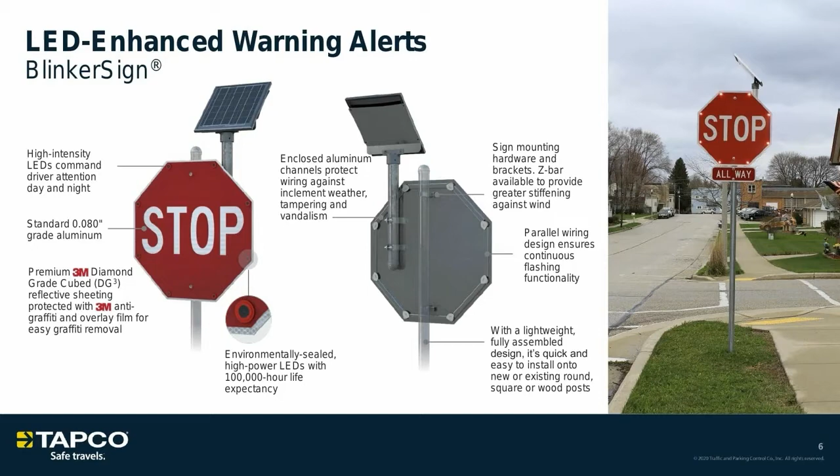Again, with these signs, we can make these in any legend. So I know the stop sign is what we have become most popular for, but any MUTCD legend or any custom legend - really the only limitation we have is the LED colors we have right now, which are red, yellow, white, and orange. That does accommodate about 95% of MUTCD signs. That's really the only limitation at this point.

We do offer auto dimming within our LED enhanced signs. So based on the ambient light that's outside, that will determine how bright our LEDs will flash. We have a 6-step algorithm that we use throughout the day. This allows for better battery conservation and allows the LEDs to be bright enough for drivers to see, but not blinding for situations such as nighttime.

TAPCO did realize, as we were in the market for a number of years with LED enhanced signs, that there were other types of warning devices we could be a part of. As we understand, something such as a beacon has been in the industry for 40, 50 plus years. In regards to beacons, there is an MUTCD guideline that everyone needs to meet, so there aren't a whole lot of feature benefits when it comes to an LED beacon head.

TAPCO utilizes Dialight models, which is a well-known, well-represented brand in the industry. We offer these in 8-inch and 12-inch sizes. And again, really our big claim to fame with our beacons is our ability to custom mount them however you need be. We're not limited to a certain type of pole setup.

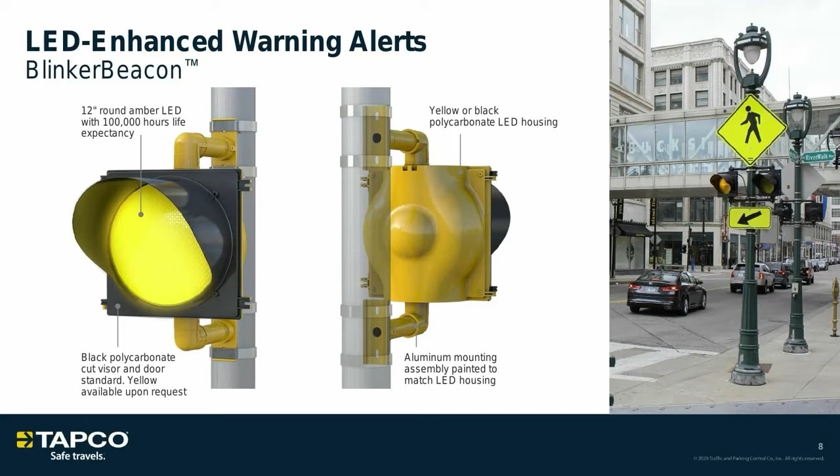One big value add that TAPCO offers in the industry is power sourcing. We want to make sure we understand your situation, look at the area, and provide the best power source for it. We're always going to try to push solar because we feel it's more economical and green friendly, and we make sure we have accurate solar sizing for your equipment. It's not a one size fits all - depending on which region it's going into and what we're powering, we need to make sure we have the accurate size solar panel and batteries to give you the autonomy and battery backup needed for your system.

But when solar is just not feasible - if you have large trees or a nearby building - we have other different types of options. We can do straight 120 volt AC, very easy - if you have power nearby we can just directly tie into that. We do offer AC with battery backup, just in case you're worried about that AC going down. We also have DC to AC conversion kits, so if you're worried about solar potentially having any issues, we have a conversion ability to go straight to AC.

As you see in the photo, we also offer streetlight power. This can be very beneficial in situations where solar isn't feasible and you don't have power nearby - running power out to that location can be very costly, but if you have a nearby streetlight, it's probably running off 277 volts. So what we'll do is tie into that streetlight power, which at nighttime will charge our battery, and our battery will continuously run our system. No matter where you're putting in one of our solutions, we will have a power source available to run it.

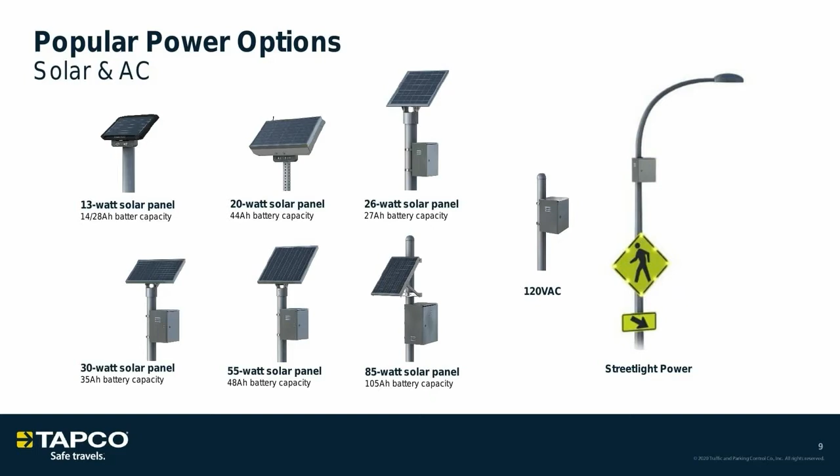The first solution I'm going to jump into today is our dynamic curve warning systems. These have been around with TAPCO for 10 plus years, and really took off a number of years ago when we teamed up with FHWA for a study, which I'll jump into here in a second.

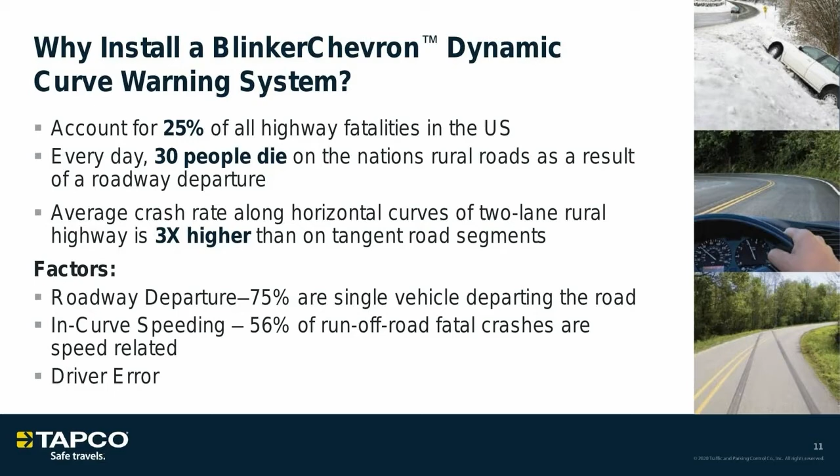Rural curves account for about 25% of all highway fatalities in the U.S., usually dealing with runoffs, roadway departure, speeding, and driver error. In a lot of these rural situations, there's just not enough lighting. That's where TAPCO teamed up with a couple of agencies and FHWA to develop a solution. We ran testing with FHWA for about 18 months at 12 curve locations across the United States. After that 18-month data, we proved that we reduced crashes at horizontal curves by about 58%.

We've actually seen higher data in some local municipal studies we've done, but we think that is excellent data to justify the cost of trying to put one of these enhanced systems in there.

We have well over 200 installations nationwide at this time. We usually like to take a look at understanding if it's a rural versus urban setup to provide you with the proper design.

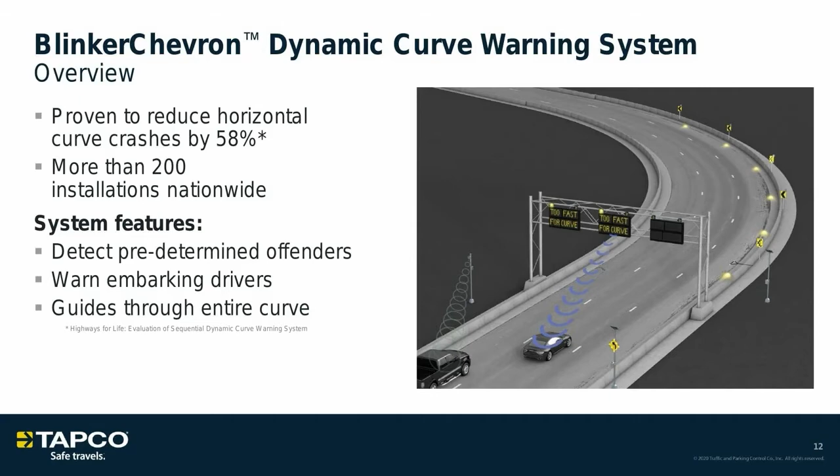We have a couple of different flash patterns that we offer to guide you through that curve. One is just a true sequential flashing pattern, which gives you a pull-through effect to pull that car through. We can have all the signs simultaneously flash as well through that curve.

For some longer radius curves, we offer segmentation as well. So for instance, if you have 16 curve warning signs sequentially pulling a car through, the car is never going to be able to see all the way through those 16 signs. So we'll segment them into, let's say, 4 to 6 signs per batch so that the car gets the true effect of the pull-through.

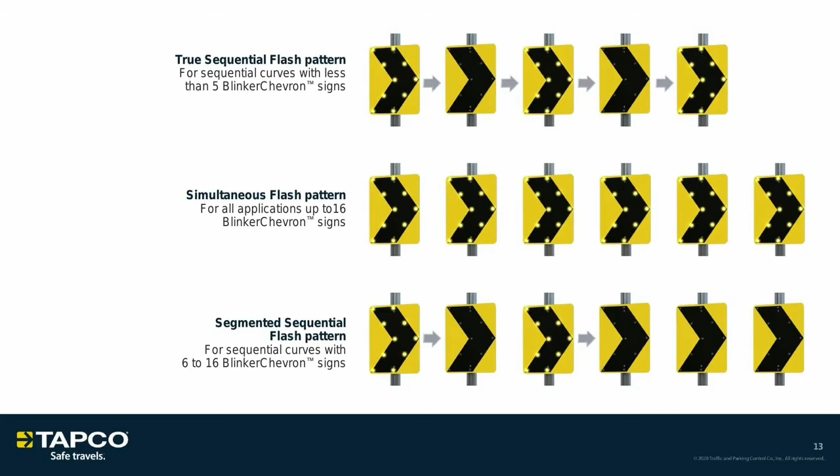One of the big value adds TAPCO came out with a couple of years ago with our curve warning system was developing a ruggedized version of our LED enhanced sign. We had put our standard 080 or 125 signs out in some mountainous, snowy, high-speed truck traffic areas, and we realized after a number of years that the weather environments had too much effect on the signs as far as wear and tear. So we developed a ruggedized version of the sign to put up in those types of areas.

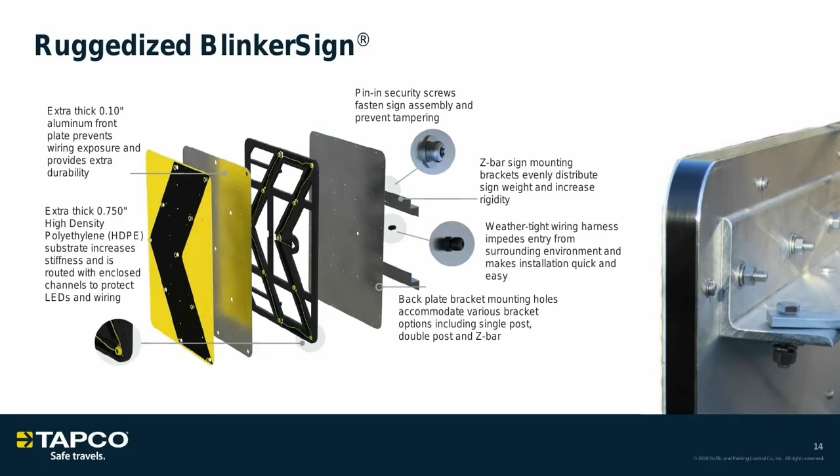So that's something we're going to ask when you come to us with a solution - what is the speed, where is it going, the region - understanding the environment to suggest whether we go with our standard model or a ruggedized version. These ruggedized versions can be made in any MUTCD sign as well. We do them most with our curve warning systems, but any MUTCD sign we can make ruggedized.

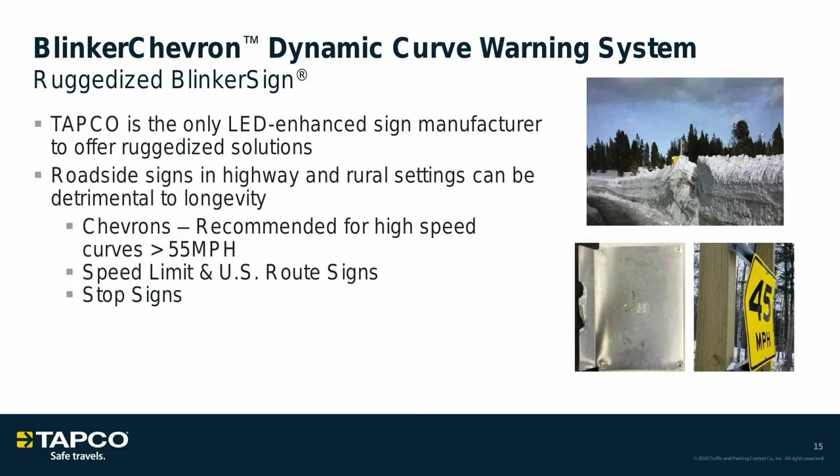As we find out your situation, we'll suggest whether to go with a standard sign, or potentially a middle solution, which is just putting some Z-bar on the back of the sign to make it a little more stable, or otherwise going with a ruggedized version.

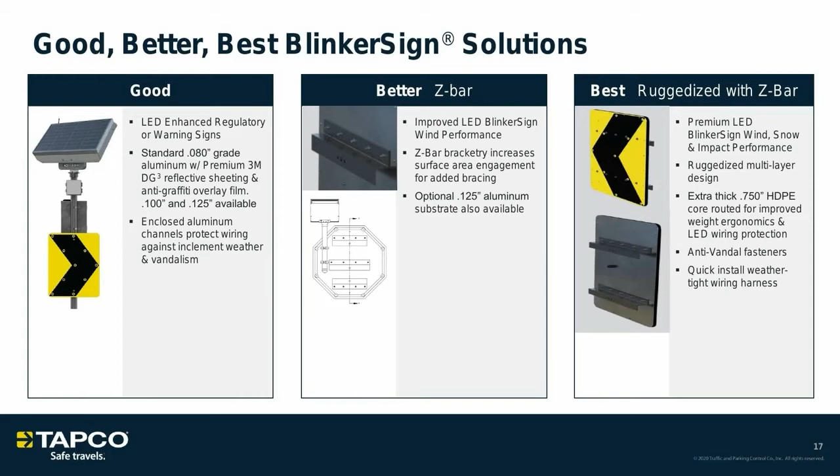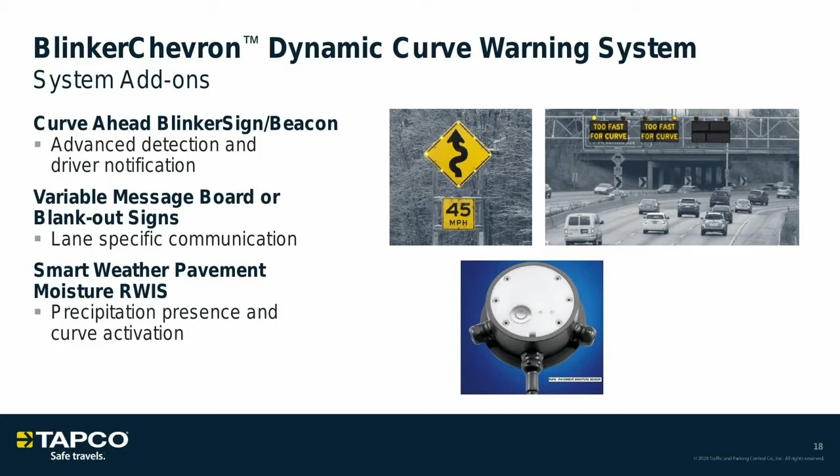We can not only run these 24 hours a day, we commonly have them activated by a Doppler speed radar. But in situations that are more climate-related, potentially slippery rain type scenarios, we offer some pavement moisture sensors as well to trigger the system. So a lot of different features and add-ons that TAPCO can offer.

The next solution I'll get into here is our overheight warning system.

TAPCO dove into this solution about 6-7 years ago. We knew of a couple of overheight detection companies that existed within the industry, but we felt there really wasn't a full-blown solution that existed out there at the time.

As our bridges continue to age and our vehicles continue to get taller and our semi-trucks continue to carry higher loads, a lot of these bridges that were developed many years ago are just not feasible for these vehicles to get through. So making sure we provide the proper signage and warning systems to reroute those vehicles from those areas is very important.

Anytime a vehicle hits a bridge or gets stuck under a bridge, the cost of having to repair, maintain, the liability behind it, closing the roads - it's very, very costly. So if you do have scenarios where that happens annually, this is a great solution to look into.

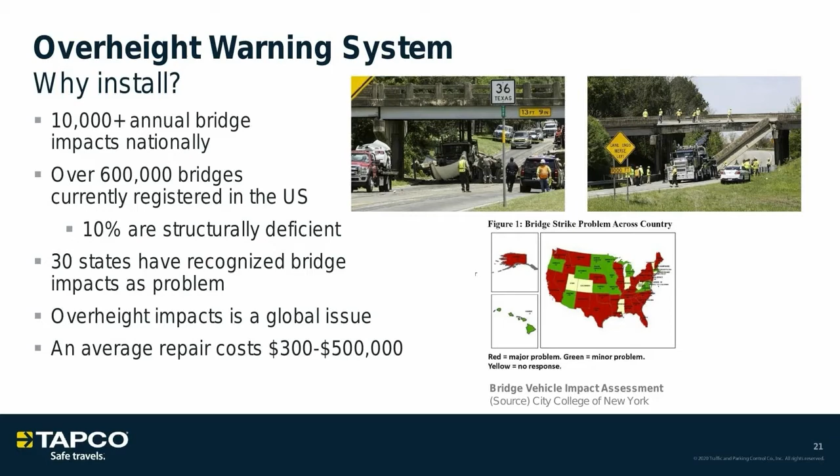The way our system works is as a vehicle heads towards that location, we'll have poles on each side of the road holding either a single beam or a dual beam sensor system. As the vehicle actually triggers that system, it will activate a warning device.

The reason we have single beam and dual beam: single beam works if it's a one-way road, though it isn't ideal for traffic coming the other direction—it's a lower cost solution. But we strongly encourage doing a dual beam. Dual beam allows for redundancy to ensure nothing like debris or birds actually trips that beam. So the dual beam is definitely what we suggest.

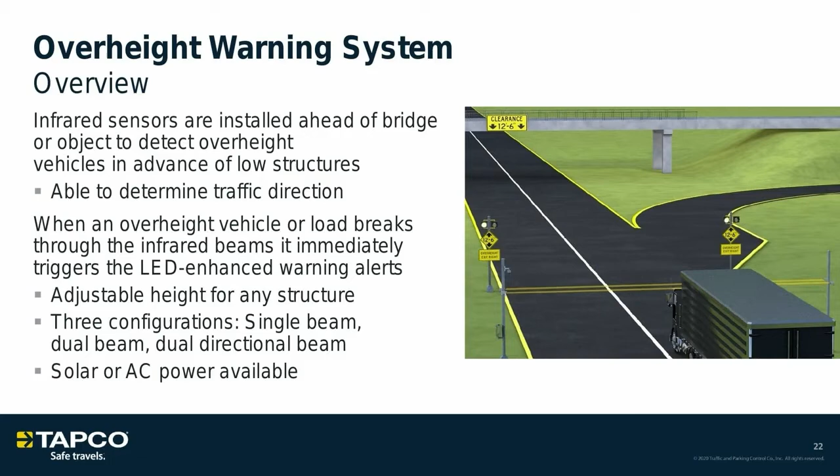Some of the great add-on features we offer for our overheight warning system: one is an overview camera. We use it for visual indication if you want to receive alerts anytime the system is triggered. We just install a modem inside your system, and through any web interface you can log in and we can provide visual recognition as well, instead of just receiving a text or email. That's where license plate and camera recognition cameras come into play.

Another great feature we can offer is CVI, connected vehicle interfaces. I'm going to talk about that through a few of our different solutions today. TAPCO does offer a full-blown CVI solution that includes roadside units and onboard user interfaces. As we continue to develop new systems and roads across our industry, we'll continue developing more systems for smart vehicles that are coming out. I'll talk about that here in a little bit.

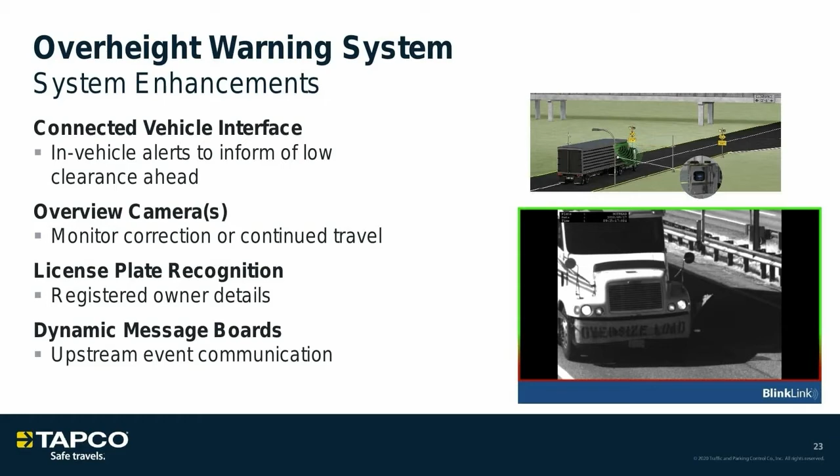The next solution is our high water warning system. It came out about 6 or 7 years ago, after Hurricane Sandy came through Massachusetts, New York, and New Jersey. A couple of different agencies came to us asking what type of solution we could develop to reroute cars from those flood zones. That's really what got us into this solution, and we've learned and created solutions and features ever since.

While flooding commonly occurs in coastal areas, it can happen all across the United States. There are poorly designed roads underneath bridges with high annual rainfall that can flood consistently, and it's really hard to reroute vehicles from that area. It's hard for drivers to know when that's coming up, so that's why we're developing this solution—to give vehicles more notification or reroute them from that area.

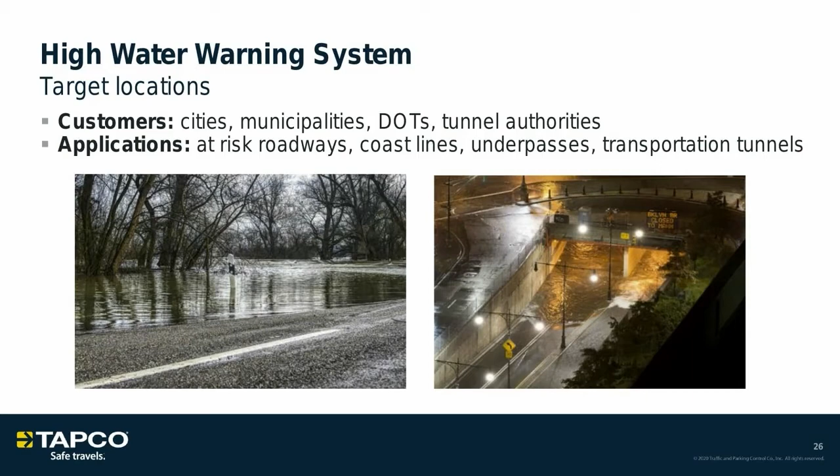While coastlines are very common, underpasses, tunnels, and other at-risk roadways are all scenarios where we can utilize this type of system. Most commonly, TAPCO utilizes a 3-pole system for this scenario. We make sure to understand your area and place our detection pole at the absolute low point, to ensure that when the water rises, it's tripped at the proper time. At that point, through wireless communication, we activate enhanced warning systems to give the vehicle notification or reroute them from that area.

One of the great features we offer, like in the overheight system, is alert-based notification through visual recognition. So you can know when the systems are being tripped, and see if there are any vehicles stalled at that point. Those are great features to offer, just to be a little bit more proactive as you're heading out into the field.

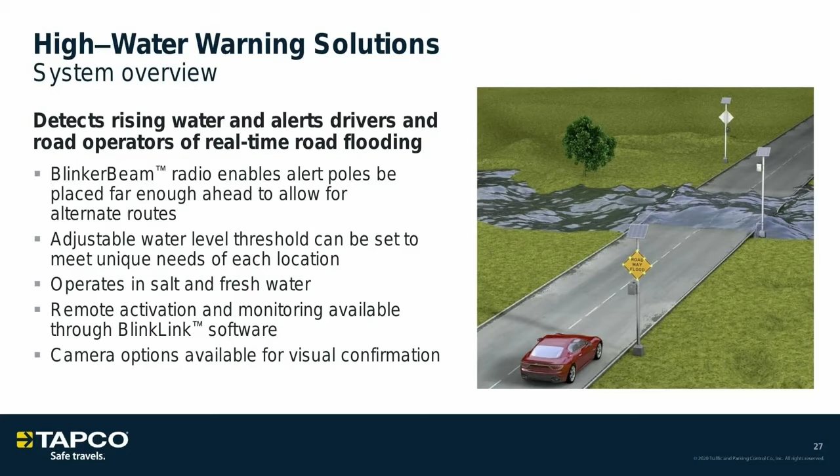While the 3-pole scenario is most common, TAPCO is happy to design a full-blown system throughout your potential coastal city. The largest layout we've ever done is about 80 signs throughout a community. We took a drive through that community to understand where the routing was to evacuate vehicles through that coastal city. We made sure to put the detection at the proper points and the warning devices at the proper points to give vehicles the proper routing scenario to leave the community when those types of floods are occurring.

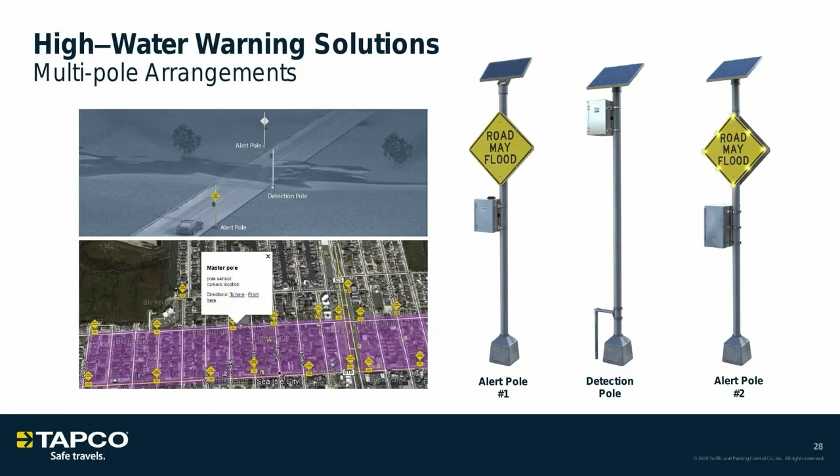TAPCO offers a few different types of sensor mechanisms right now, because with high water, depending on the scenario—whether it's a bridge or tunnel, an at-risk roadway, or whether we're talking coastal saltwater or freshwater—there are different types of sensors best for each scenario. That's why TAPCO mentions a few different ones here, but we're definitely open to other ones in the industry as well.

The photo eye, which TAPCO had used for a long time, is a fantastic sensing mechanism, but in saltwater locations it can get a little debris on it. So it's something you'd need to maintain and go clean every few months. That's why TAPCO moved into the pressure and float mechanical type of layout, to allow for more of a mechanical situation that wouldn't have to deal with either saltwater or freshwater issues—it works easily with both.

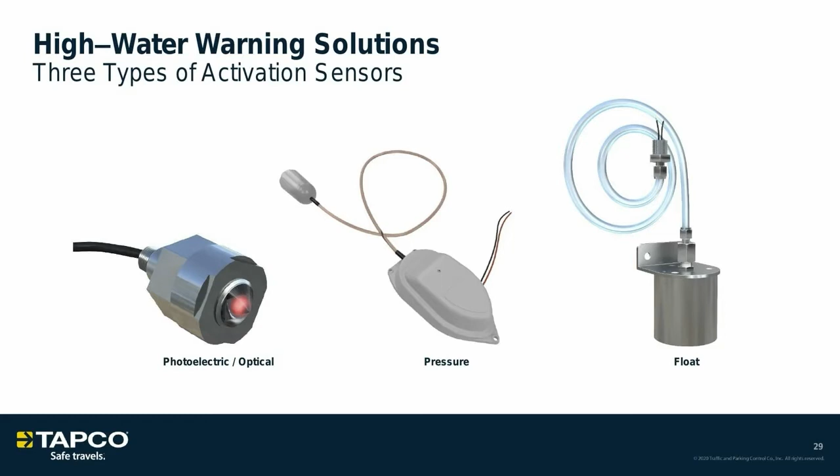The way the system works for a pressure sensor is it uses air pressure, and as water fills up it triggers the switch. The second part of that redundant two-part mechanical system is the float sensor—as the water rises and pushes up that float mechanism, it'll also trigger a switch. So it gives a two-part mechanical setup to ensure the system is triggered whenever a high water incident occurs.

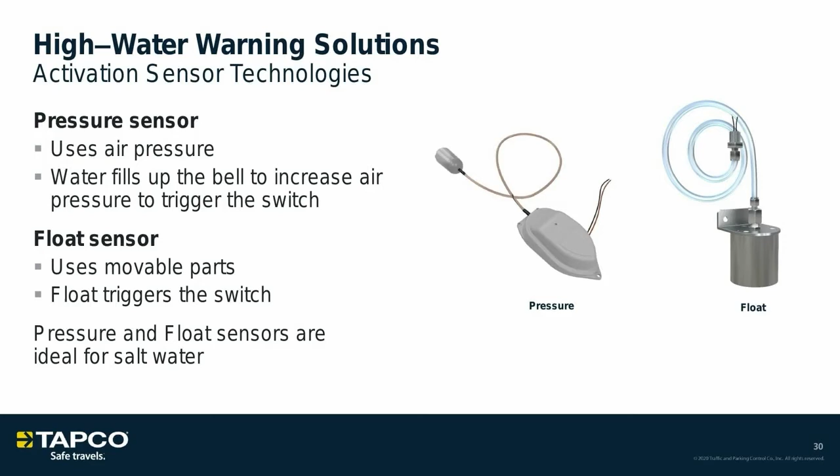As I talked about here, there's a nice visual web interface that TAPCO offers called BlinkLink, so you can get the actual visual image of that flood zone to know if you need to send somebody out or not at that time.

As I talked about earlier with the overheight connected vehicle interface, I'm going to get more in depth on that in a few slides, so I won't talk about it too much now, but this is something that can be utilized in any one of the solutions I talk about today.

There are a few different high water warning system companies out there at this time, so the real value add for TAPCO is the A to Z, beginning to end, turnkey experience—us going out to the field, helping design, helping you understand where the best pole placement will be, and providing different types of detection points or warning devices to best suit your application. Most competitors offer a single type of detection and a single type of warning device; we try to give you different options for different scenarios. Afterward, TAPCO is there to help you on site, oversee the install, and support turn-on, making sure everything is running great before we head back. We just want to provide that A to Z experience.

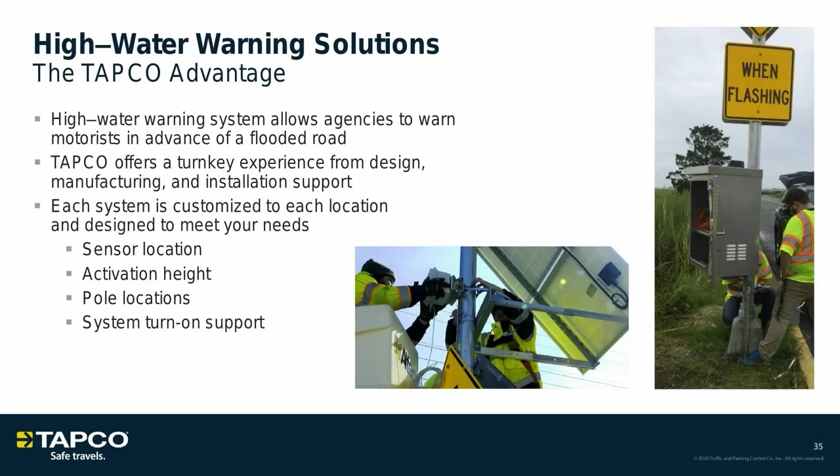The fourth system I'll get into today is our intersection conflict warning system. There are many rural scenarios where high-speed main thoroughfare traffic bypasses minor road traffic, and whether due to visibility or consistent traffic, incidents commonly occur—but it just doesn't warrant putting up a signalized intersection, which can cost $200,000-$400,000. So TAPCO has taken that same technology through detection, communication, and warning devices, giving vehicles proper warning for caution and slowdown as they hit this location, whether it's a blind corner, a hill, sharp turns, or high-speed traffic passing a minor road with too many speeding incidents.

TAPCO will put warning devices at all four corners, making sure we're giving all vehicles the proper warning to get them to slow down going into that intersection.

One type of feature that TAPCO has recently added is a portable camera data collection system. If you want to get some of that data prior to putting out the system, or collect some of that data while the system is out, that's something we offer. Many of you may have already collected data and understand the amount of incidents, accidents, and vehicle traffic that already goes through, but it's just another feature that TAPCO offers with these systems.

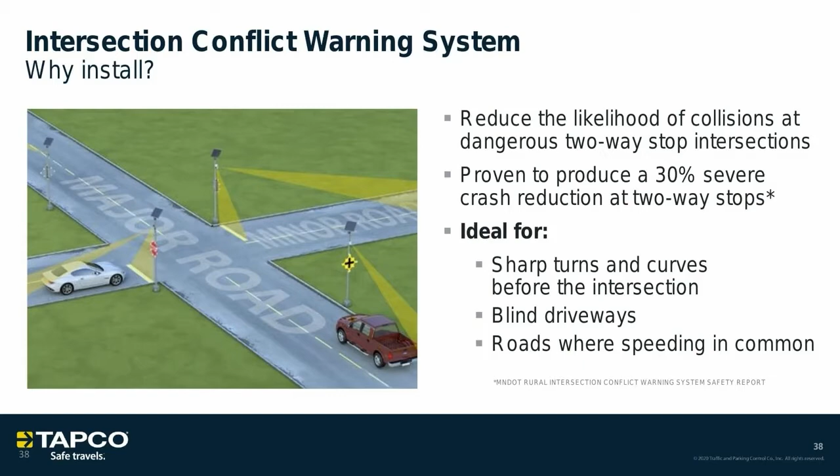Next, I'll get into school zone systems. As school starts this year, we want to make sure we can guide our children properly through the correct areas to get to those schools safely and soundly, as many times these schools are very near high-speed roads. We want to make sure we're getting those vehicles to slow down, especially around school hours.

TAPCO offers a number of different warning devices, anything from dual flashing beacons to LED enhanced signs to driver feedback displays. The great thing TAPCO can offer with these is that they can all be utilized through that web interface. So if you're having to manage 15 or 20 different schools that have 4 different warning devices each, instead of having to go out during half days, snow days, specialty vacation days, or summer, you can actually log in and set them all within a matter of minutes. It's a fantastic cloud-based feature that we offer for all of these devices to really save you a lot of labor time throughout the year of having to change out the clock on these types of warning systems.

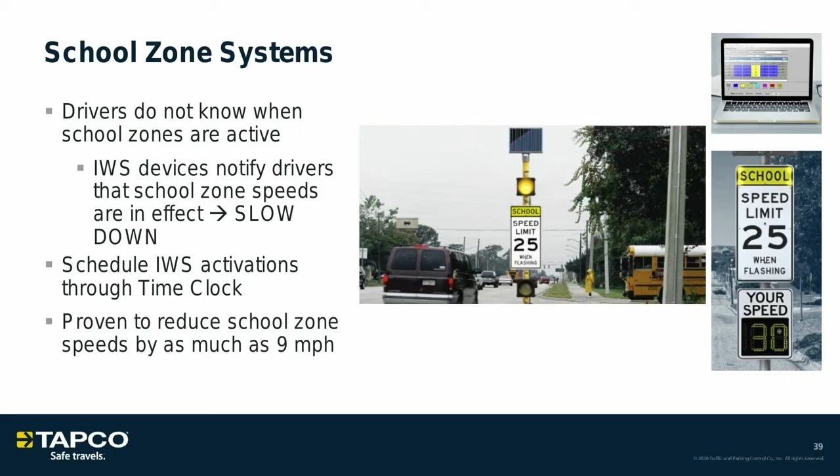One of the features we've offered on this remote alert-based system now is lights out notification. Not only can you program and set your calendar remotely, but you can actually receive alerts if the battery is low, if your solar is low, or if the communication is low. And now we actually offer, if you have a lamp out on your beacon system, we can provide that information as well. It's just giving you more diagnostics to understand when you need to go out into the field and maintain your equipment.

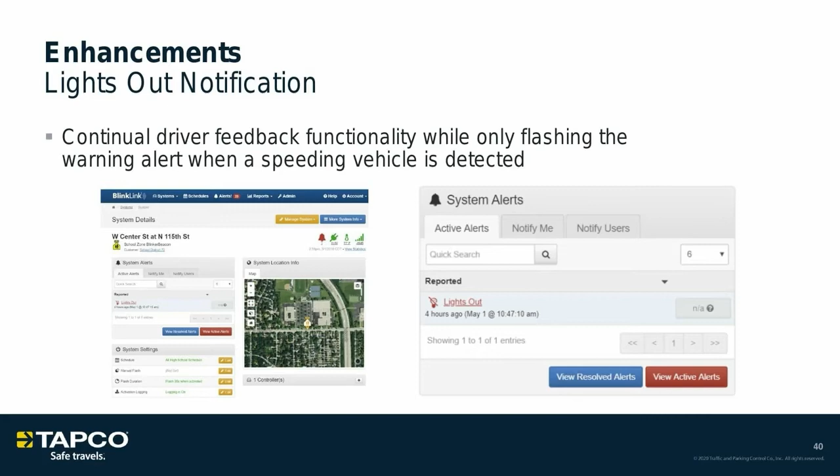The speed feedback signs I talked about for school zones are not only for school zones, but can obviously be utilized anywhere from a warning and regulatory standpoint. TAPCO offers, we feel, the most economical driver feedback systems in the industry. We offer both Bluetooth as well as cloud-based scenarios for monitoring and programming your systems. Many different digit sizes, many different additional features, different power sources from AC to battery to solar. We feel driver feedback signs are becoming very prevalent in our industry, and at this point we just want to make sure we offer all the features you need at the most economical price in the market. So if you need any quotes on a system like this, please let your TAPCO representative know.

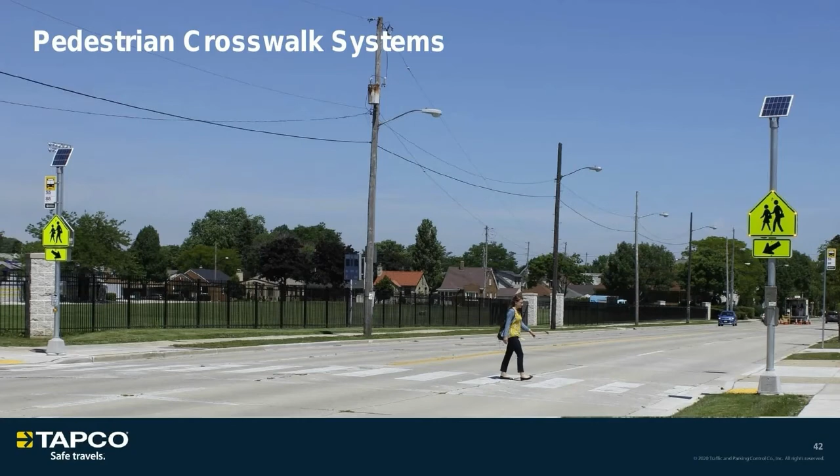Next, I'll jump into pedestrian mid-block crosswalk systems. TAPCO has been in this market for a good 15 years. We first came out with an LED enhanced warning sign, then we jumped into circular beacons, and then I believe it was roughly 2008 when the RRFB started to trickle into the industry and has really taken the industry by storm at this point.

The data that came back from the RRFB testing in St. Petersburg, Florida, many years ago showed the highest yield to pedestrian data of any type of yellow warning device that's ever existed. Due to that, the MUTCD made its own special section and has approved this type of warning device. So again, we aren't limited to the type of warning device you need to utilize, from LED enhanced signs to beacons to RRFBs to in-road warning lights, blank out signs, and we can trigger them in many different types of fashions.

The RRFB has to be pedestrian activated, so it needs to be activated by an active push button. We have many different types of those, or passive detection, which I'll talk about thermal in a bit, as well as IR walk-through bollards. Some of the LED enhanced or beacon systems are a little more capable of utilizing other types of systems, such as running 24/7 or on a time clock. The RRFB has very strict regulations on how it needs to be utilized, so we'll make sure to provide you with that education as well, if you are looking for that type of device.

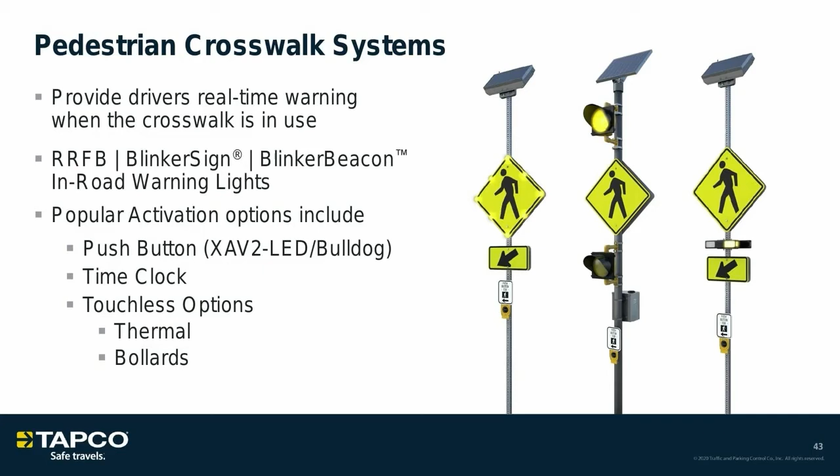So as I mentioned, FHWA did interim-approve the RRFB through IA-21, so TAPCO does follow this to a T. It's important to know that when you call in, we will make sure we follow the IA-21 regulation. Our LEDs do actually exceed that size requirement in IA-21, and we offer a universal mounting bracket to allow it to mount to many different types of poles.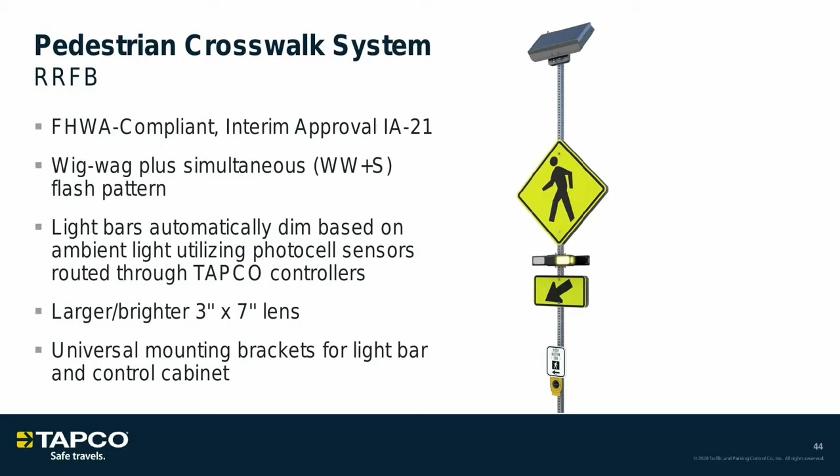I talked about earlier the thermal detection enhancement. We believe thermal is the most accurate type of passive detection out there in the market. Again, it detects directionality of the pedestrian. It allows you to set zones to ensure you are picking up the pedestrian when they're in that zone, and you're not false triggering when vehicles come by perpendicularly or around the corner through that crosswalk. Thermal is by far the most accurate type of detection out there, and we will eliminate any type of false triggers.

So if you are looking to get into passive detection because you're in an area where you're just not seeing people push the push button, we see that commonly in university and school areas, this type of passive detection is outstanding for that scenario.

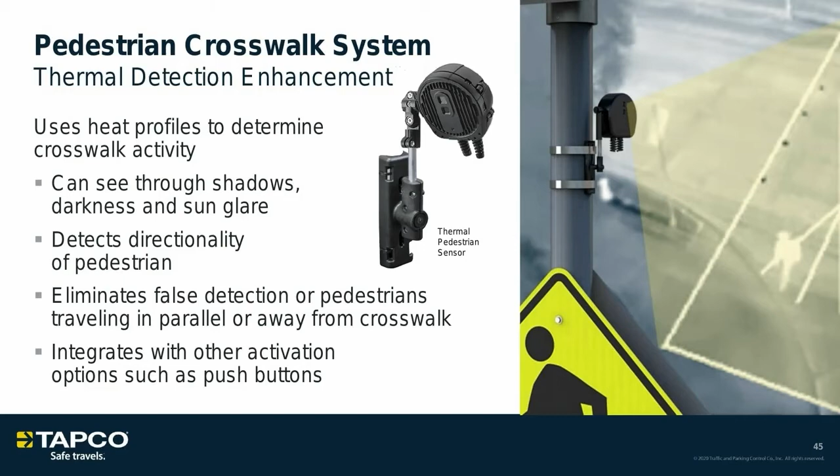Another great feature we offer as an enhancement to our mid-block solutions is our SafeWalk illuminator light. Not really sure why, but this industry hasn't had a whole lot of solutions for actually enhancing the crosswalk at night to see the pedestrian. We do a great job providing warning indications to vehicles that a crosswalk is coming up, but the industry hasn't always enhanced that crosswalk to ensure the pedestrian can be seen. So if there isn't a street light nearby, TAPCO offers an illuminator light to make sure we can enhance that crosswalk at nighttime.

The system will only activate via photo eye, so it's only available at night and will only trigger when the push button or the detection is set. Since it doesn't require much power, we're able to utilize the same type of solar options that we use with our standard equipment. So again, it's a great low cost added feature for your mid-block solutions.

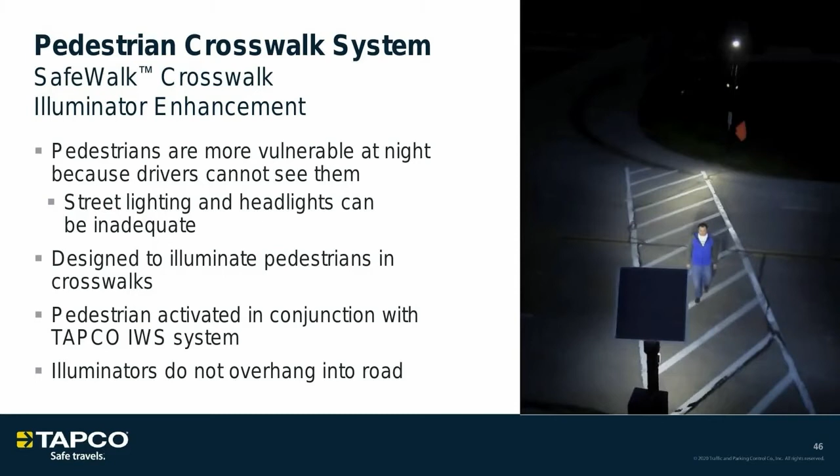Now I'll go into a little more detail on the connected vehicle interface. TAPCO jumped into this market about a year or two ago. We all understand, going through trade shows and webinars out there right now, that smart vehicles and CVI are one of the bigger topics, as people try to understand how we're going to develop our roads for the future for these smart vehicles. The nice thing about the development of the TAPCO system is we made it agnostic, so it's able to work with DSRC or 5G networks.

We understand that DSRC has a good footprint out there right now, so if you're looking to do a project currently, it's probably going to work with DSRC. But we understand the future is probably working through 5G networks as more towers are built, so we have the ability to work with either. One of the great things about this type of system is you may not need it right now, but all TAPCO systems can be easily upgraded to add this connected vehicle interface in the future. So if you're putting up any type of solution now, and you might think about doing something 3 to 5 years down the road, the great thing about our solutions is they can be easily upgraded, so you don't have to tear down the existing equipment to change it in 3 to 5 years.

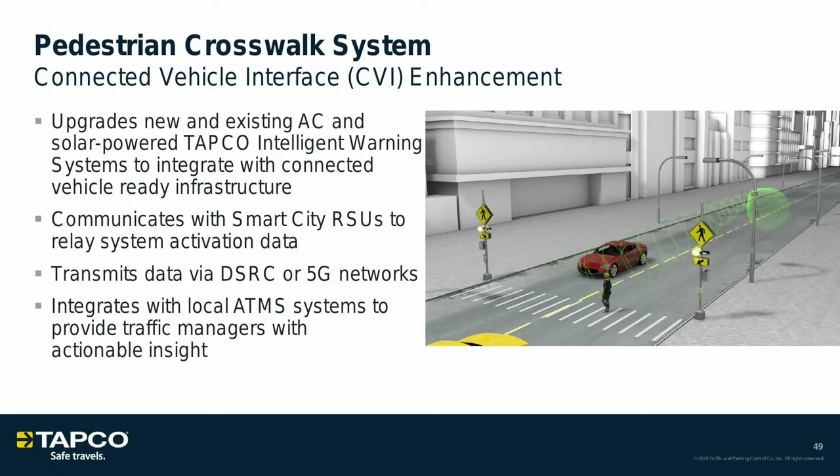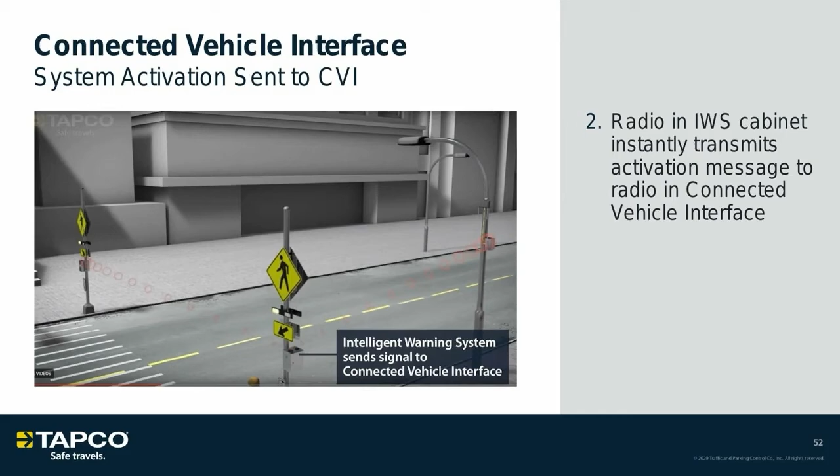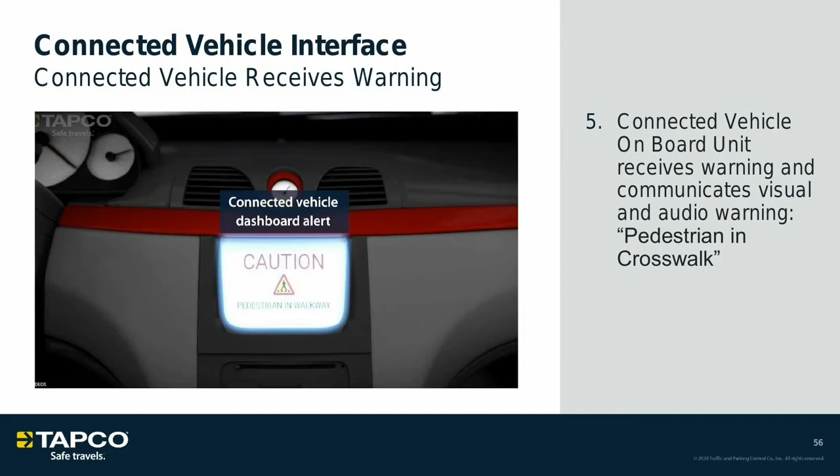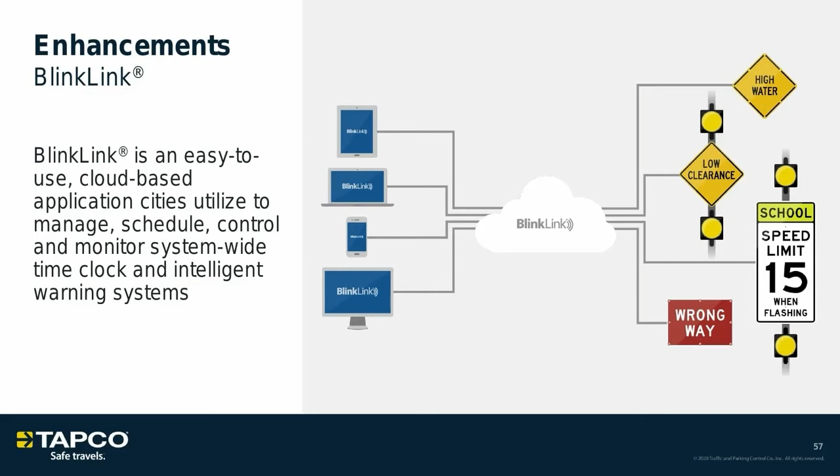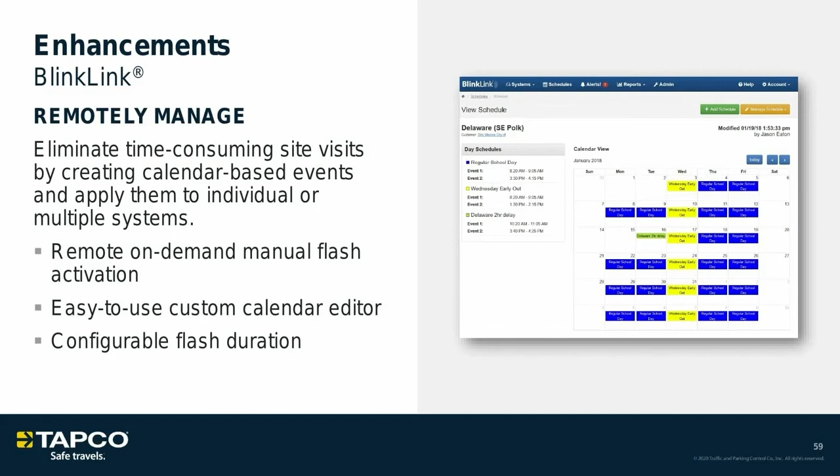So the next type of added feature that we can offer to any one of these systems is the web-based BlinkLink that I've talked about here. Not only can you map out all of your systems and calendar set them, but you can receive alerts and data. Again, it gives that smart city approach, making sure all of your intelligent warning devices are on one platform so you can monitor them accurately, get historical data, remotely manage through an easy calendar-based setup, and receive text or email alerts. If we have a camera out there, you'll get a visual indication as well.

That's something you're only going to get the visual on if TAPCO offers that additional camera. So if you do want that, I'll make sure that's noted at the time of quoting.

I have one question pop up regarding the pedestrian crosswalk from Thomas. Does ADA govern these devices? For example, are APS buttons required?

ADA doesn't govern the devices. The ADA comes out with specifications that are highly recommended, just like the MUTCD does, giving guidance on what needs to be done. Between ADA and APS, we are seeing the industry move towards APS buttons, but right now they are not required, just recommended. For instance, the RRFB, the latest specification that came out, states they're highly recommended but not required. We are seeing more and more agencies move towards that, and FHWA has the ability to work with ADA to change that at any time. But right now, APS is just highly recommended, not required.

So I'll jump next into our wrong way alert systems. I'll go real brief on this, as it's usually utilized more at a state DOT level, tollways, turnpike authorities, things like that. A real basic system here. TAPCO is currently leading the industry in wrong way alert based systems. We've been doing it for about 7 years.

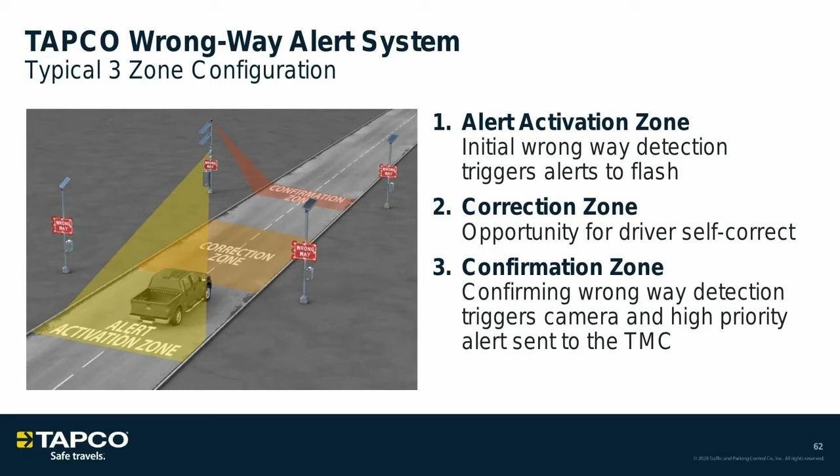Our goal is to prevent vehicles from getting onto the highway in general. It's very important that we place poles to make sure these vehicles see enough flashes from the warning devices to allow them to correct in the correction zone and turn around. But we do understand some vehicles will make it all the way through, which is why we want to make sure we have the proper detection and confirmation set up to provide those alerts back to the TMC.

For those getting in depth, I won't get too much into this, but we do offer direct connection into TMC software, whether through a cell modem API interface or through fiber connection that's already existing out there. So we have the ability to work within the state's infrastructure right now, and it's not something that has to be fully on its own with the TAPCO system.

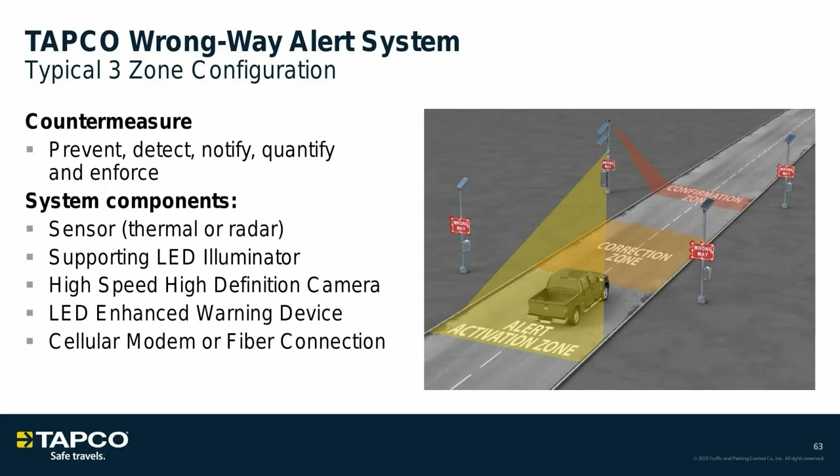So I talked about some of our most popular systems out there right now, but that's not what TAPCO is limited to by any means. We're definitely trying to understand and get far more into the smart work zone space, so we have a lot of solutions there as far as being able to set up a smart work zone or provide hardware that's providing more data back and more visual indication.

We offer many different types of rail solutions, queue warning areas, whether the queuing is in the rail area or on the highway itself. We offer different types of weather solutions, RWIS, icy road conditions, slippery when wet, snowfall. We offer a number of solutions for weigh stations, trucks exiting and entering, as there's a lot more need for those types of solutions on the highway. And as bike paths continue to become more prevalent, we offer a number of different solutions for bike paths as well. These are just a few of the others that we dive into.

If you have any type of scenario right now where you're trying to figure out the best solution, or you're having continual incidents or accidents, contact your TAPCO representative. We have a lot of the technology that exists there - maybe it's just combining a number of different things to provide you the best solution for your scenario.

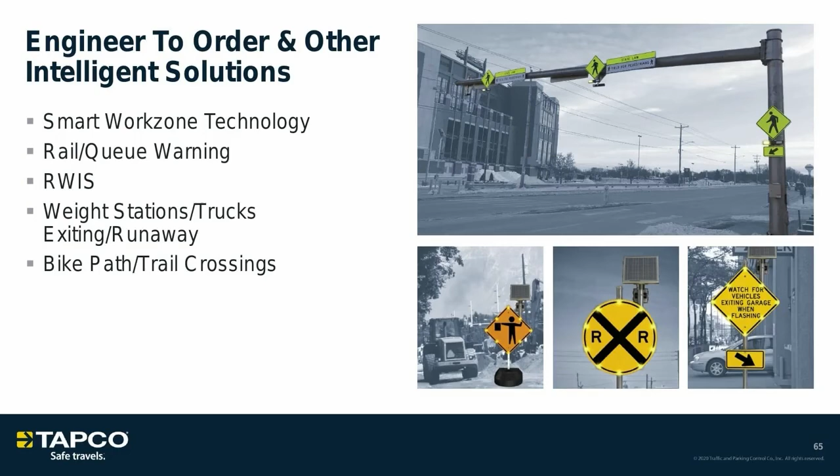TAPCO dove into the DMS market about a year and a half ago with the acquisition of Adaptive Micro Systems. TAPCO and Adaptive are one in itself at this time. TAPCO offers full-blown color, amber, larger dynamic message displays, as well as some of the smaller displays that can be utilized within mass transit and mass notification. So again, we have many different types of solutions that we can offer at this point.

Walkthroughs, front access, whatever your needs may be, TAPCO is happy to price this standalone, or we can tie this into one of the solutions we just talked about - from wrong way, over height, curve warning. So again, just another great warning device to add to our arsenal.

There are some scenarios where we believe a blank out is important to make sure you have the proper verbiage to understand what to do, such as a certain type of reroute or directionality. We think blank outs might be a better scenario than static signage in some cases. We'll always make sure we understand your location and your issues, and suggest the correct type of warning system for it.

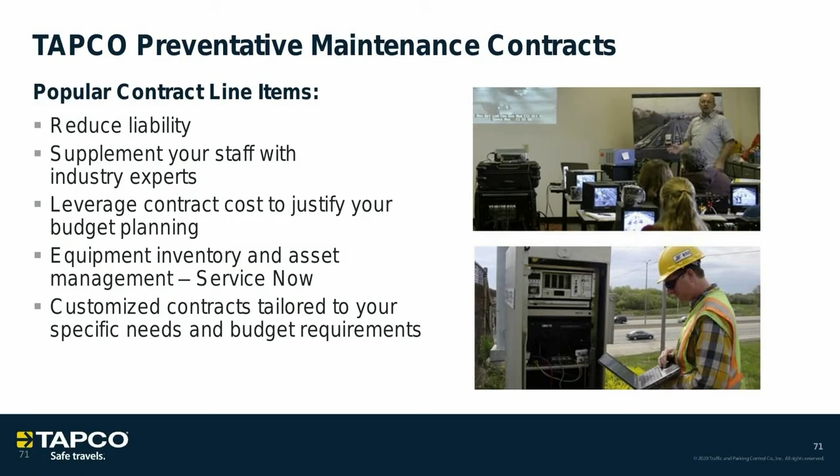When we're getting into intelligent ITS type equipment, there are things such as response time, knockdowns, emergency services - those get into a whole other realm of making sure we can provide that type of service. TAPCO will look to see where the location is, and we usually subcontract and team with local contractors to do that for you. But nonetheless, we'll make sure we understand what your needs are and if we can provide that solution for you.

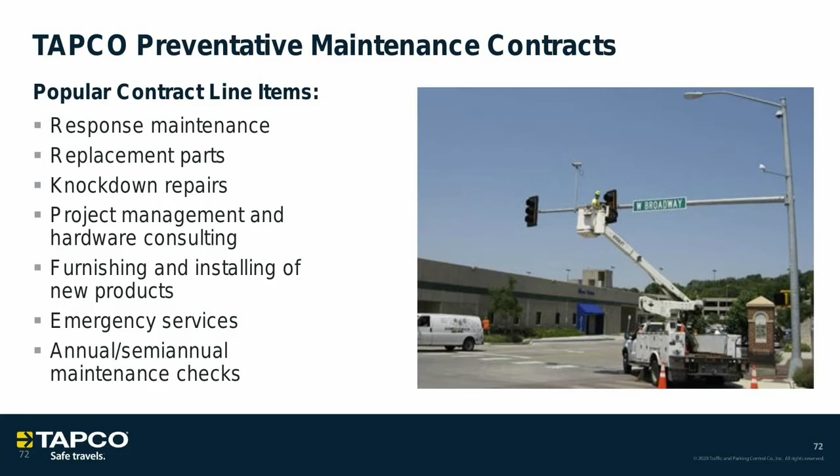The cooperative procurement side of things, which I talked about throughout this presentation, TAPCO has teamed up with Omnia, and we won a publicly bid contract through Omnia that we were just recently awarded here in 2020. It was bid for the second time. TAPCO had previously had the contract, and it was actually called U.S. Communities at the time. Omnia has purchased U.S. Communities, and it was rebid here in 2020. TAPCO now has an extended 5-year contract with Omnia utilizing this cooperative program.

It's the most widely used cooperative program in the market. Again, a great thing about this contract is it was publicly bid. We understand there are a lot of cooperative programs out there that are not publicly bid, which doesn't ensure that you receive competitive pricing.

So the great thing about this contract is that there are no annual costs to sign up. It's a very easy process for us to guide you through. We offer free freight for our purchases, and we offer you a competitive price since it's publicly bid, and we can offer every single product we offer. Even if it wasn't on the original bid, as long as we offer the same type of pricing breakdown, we can offer new products and services as well.

So it's a great cooperative program for you to work with your procurement agencies, especially if you want a certain type of system and are a little worried about something coming in that doesn't meet your specifications. We have this cooperative program to work with you on, and we can set up blanket purchase agreements through that as well, just to make everybody's life a little quicker and easier to get the products you need in a timely fashion.